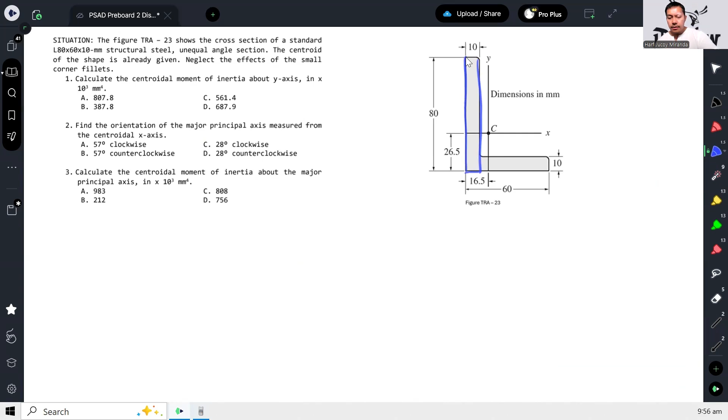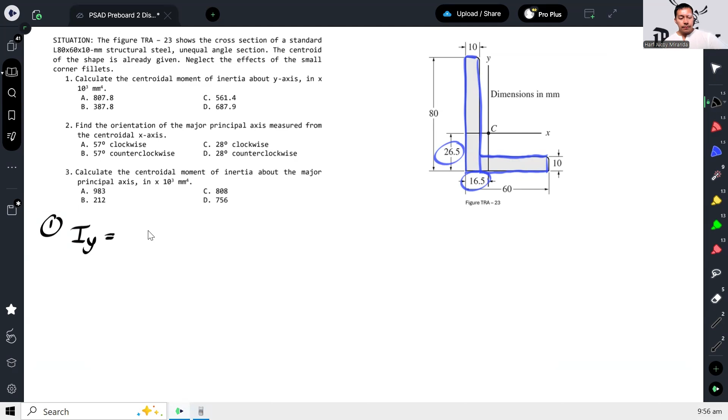So IY is equal to the summation of the centroidal moment of inertia about Y plus AD squared. So for this area, the one standing up, BH cube over 12 because it's rectangular. So our B is 80, not the 10 here. Let me put in the measurements. So this is 10, and this is 50. So we have B is 80, 10 cubed over 12, plus the area, 80 times 10.

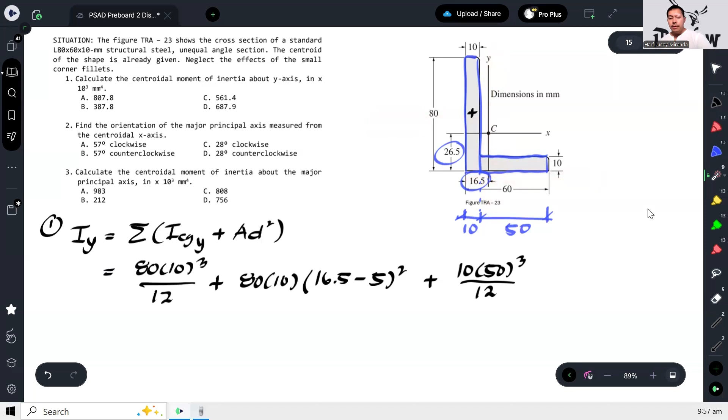Plus, for the horizontal side, BH cube over 12. So our B here is this 10. Our H is 50. Always remember, the one that's cubed is the perpendicular dimension. The perpendicular dimension is always cubed. So what we're getting here is the moment of inertia about the y-axis. So about this - all the horizontal ones, that's the one that's cubed. So here is the 10, here is the 50. Plus area, 10 times 50 times distance.

So the centroid is located here, from here to here, that is 10 plus half of 50. So how much is that? 10 plus 25 is 35. 35 minus the distance of the centroid from the left, which is 16.5. So, that is our IY.

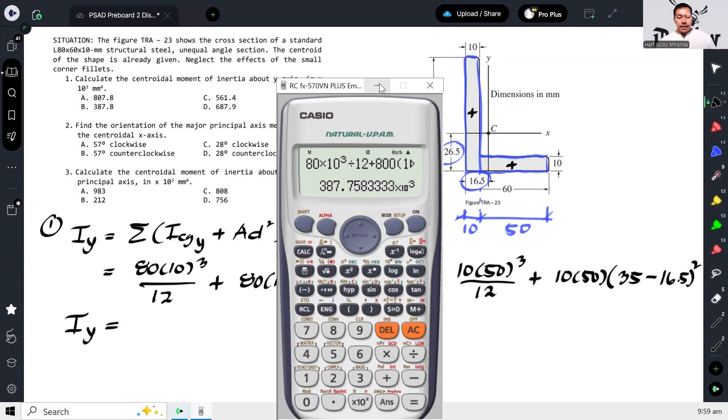So our IY would be 387.76 times 10 to the 3 millimeters to the 4th. So our answer for number 1 is letter B.

Next, find the orientation of the major principal axis measured from the centroidal x-axis. What does that mean? When we say major principal axis, this is the largest moment of inertia. And apparently, it turns out this is not it, obviously. So let's check the IX. This isn't it either, but let's check. Let's get the IX.

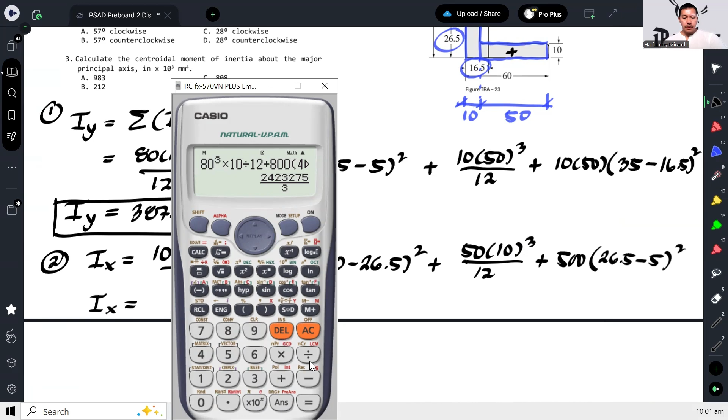So our Ix would be - let me just reverse this. And then this becomes 40 minus 26.5. And then this becomes 26.5 minus 5. So that gives us 807.76.

Okay, and like I said, this is not the principal stress - I mean principal axis. Why not? The idea is, for it to become a principal axis, the product of inertia needs to be zero. For it to be a principal axis of a section, the product of inertia must be zero, or in other words, if it's symmetrical, or an axis of symmetry of the figure, that becomes its principal axis.

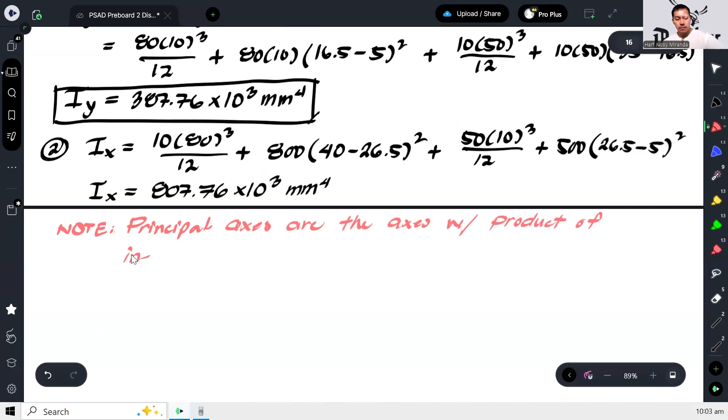Okay, so let's call this PXY. That is just the summation of product of inertia centroidal plus AXY. It's just like a transfer formula, where the product of inertia of a certain shape that is symmetrical is zero. Okay, when the shape is symmetrical, that is zero.

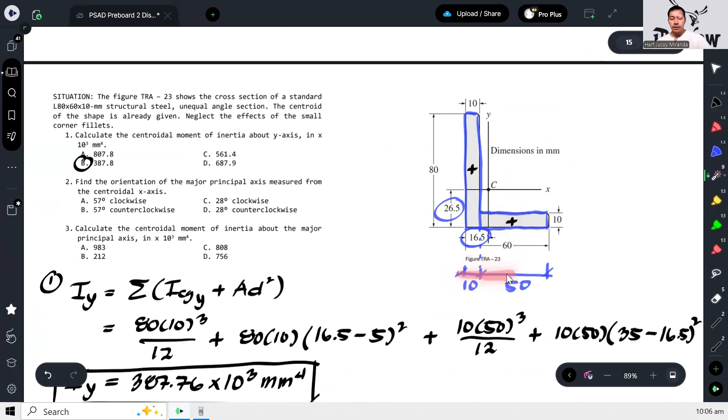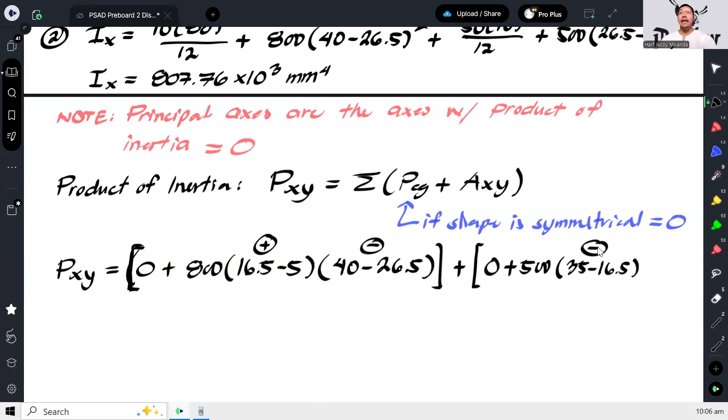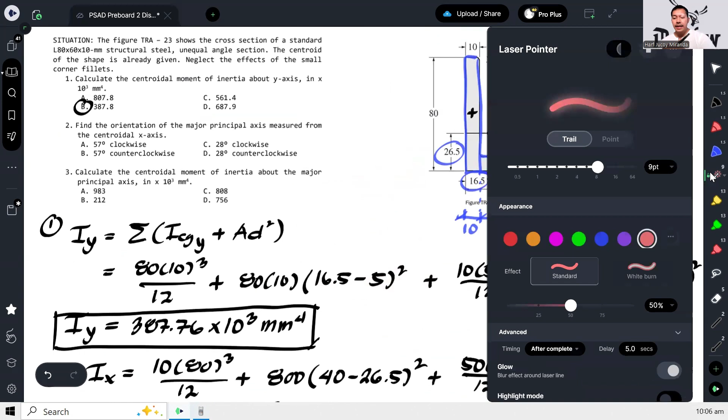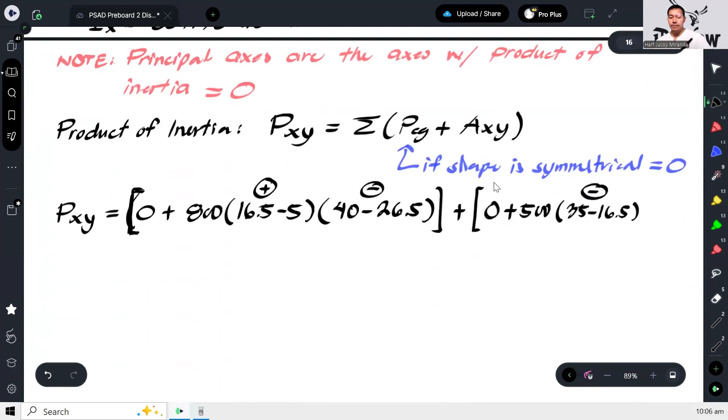So now what's its y? The y, the transfer of this centroid to the new centroid, which is upwards, and that distance is 26.5 minus half of this 10. Okay, and this is positive because it's upward.

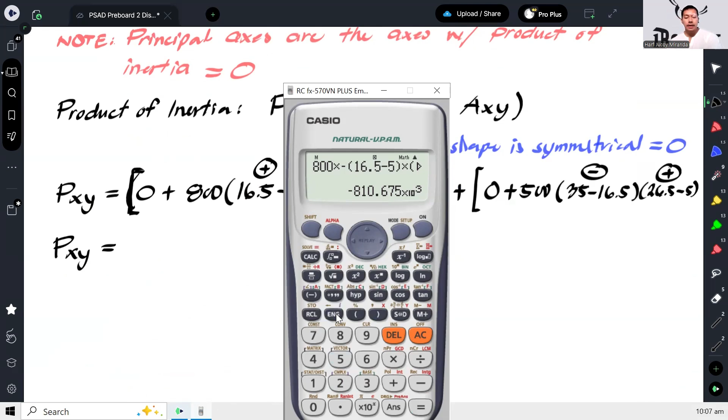So our product of inertia, you'll notice, is not zero, so that's not yet the principal axis. We'll have 800, 16.5 minus 5, but this is negative. That's negative, negative. Then this positive, 40 minus 26.5. Plus, on the other side, 500 times negative 35 minus 16.5, times this positive 26.5 minus 5. So that gives us negative 810.68.

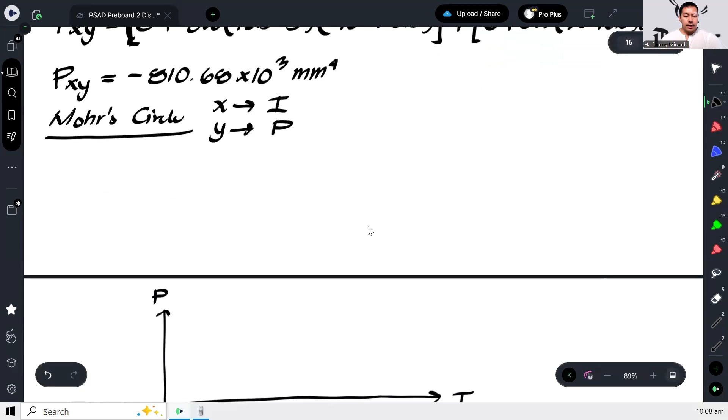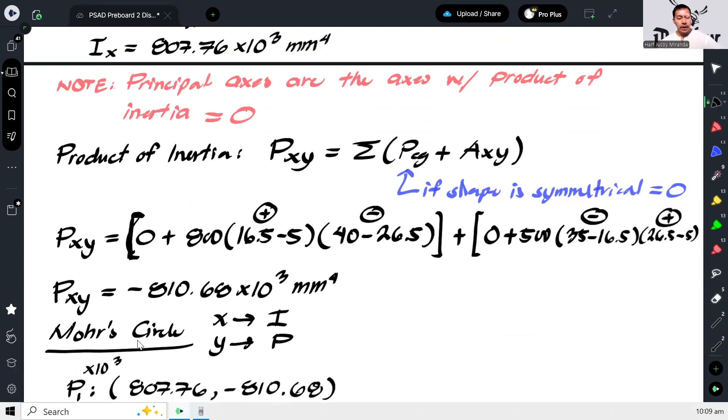Okay, so the first point, we'll pair it with the x-axis. So, 807. So our first point, point 1, will have Ix 807.7, let's make this times 10 cube, and negative 810.68. Then our second point is IY, 387.76.